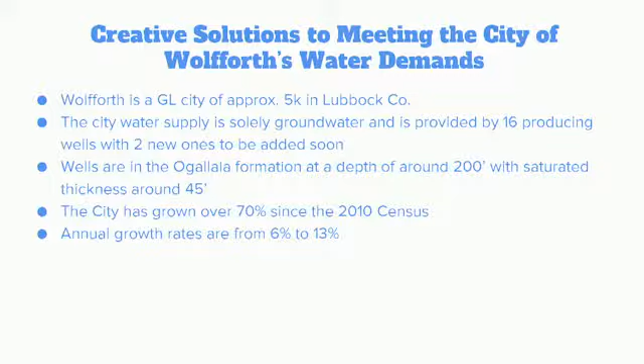We also are in a high growth area. Lubbock is growing to the southwest, and since the 2010 census, when I first became city manager, which has been almost exactly 10 years, we've grown over 70%, and growth rates can be anywhere from 6 to 13% per year. So we're being hit pretty hard with a lot of growth, and during that time we've drilled a couple of new wells, but they're not in production yet. I'll talk a little bit more about how that's worked out.

We have a certain number of technologies for a small town. We try to be ahead of the game. We've implemented a small GIS system. It's very unsimilar to what most of the larger systems and towns have. But we also, for quite some time, have used SCADA for all of our well control systems and controlling our water towers and that type of thing. And we are fully electronic read meters, AMR, completely across the town. As we've grown, we've been able to implement technologies a little bit easier than a town the size of Lubbock or the larger cities could do.

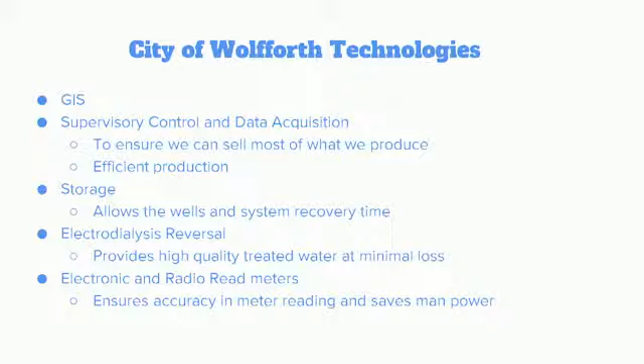Our storage, we have tried to expand as we've gone along. One of the things that I primarily want to talk to you about this afternoon is electrodialysis reversal. This is the technology that we picked to upgrade our water quality. We have a lot of talks at these conferences about volume and where to find more water. But due to regulatory issues, we had to correct some of our contamination issues, and I'll go into a lot of detail about the electrodialysis reversal.

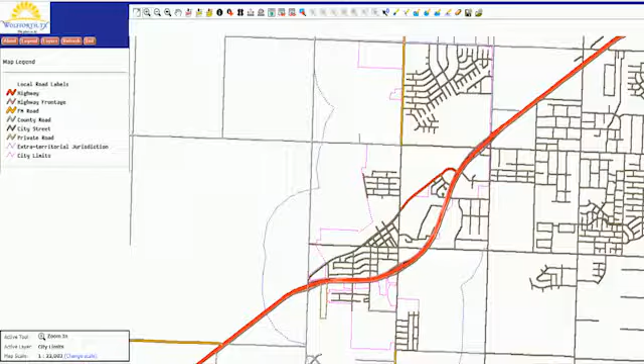I have a little trouble with the slide there. I talked a little bit about the electronic read meters. A couple of things we've done that are kind of interesting. Our GIS allows us to work with all of our infrastructure utilities. This is kind of just a skeleton view of our town, but we have layers in our GIS that allow us to look at our water system in any format and drill down into what our water system is doing at any point in time. We could look at our meters, our fire hydrants, our flows in our fire hydrants. This is by a company out of Marble Falls called 3CGO, and we use their GIS.

One of the interesting things that we've done to try to keep up with our maintenance on our wells is each well has its own website, and that's kind of an interesting concept. We go all the way back to the drilling logs if we had them. Most of our wells were old farm wells, actual irrigation wells from back in the past, so we've taken all those old drilling reports, any logs, or any type of workover that we've done with them.

One of the main things we do is we've purchased our own camera system, and we do downhole videos every time we pull the pumps and see what kind of progression we've got in the maintenance of the well. And that's been very helpful to us to have that individually.

We just use Google, and we use a process called Google Sites. And so that's how we keep up with those things. But there's an example of one of our original well logs from probably back in the 40s or 50s.

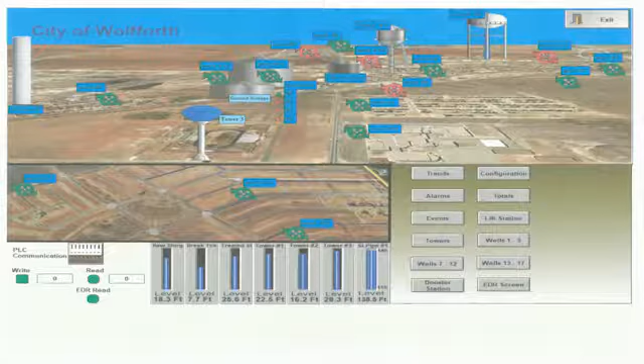Here's kind of a snapshot of our SCADA system. This shows kind of the activity and just a dashboard for the system, and you can see all of our elevated towers. We can see how many wells are running at any point in time. And for a town our size, we run with a pretty small public works department because a lot of these functions are automated.

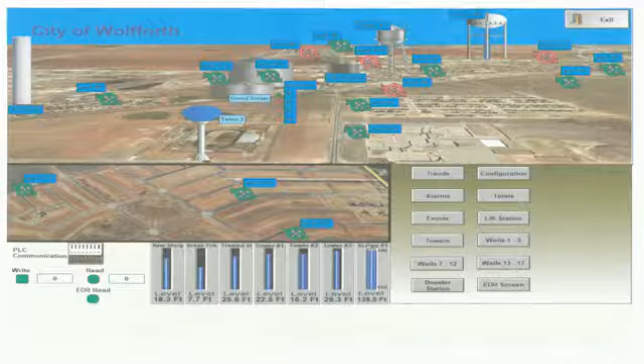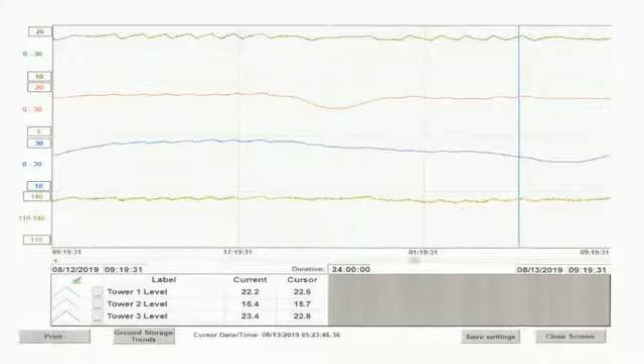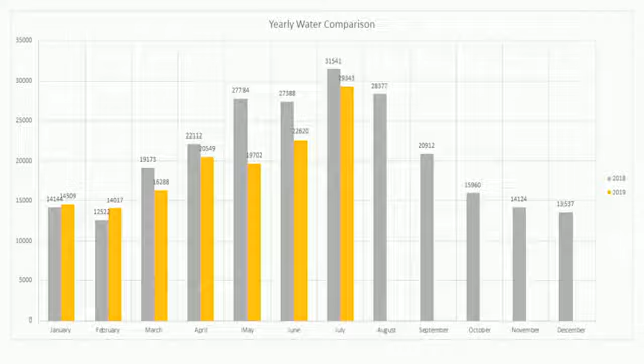This kind of shows an example of our elevated storage and how it progresses during the day and over the evening. But these graphs are helpful to us to see where our peak times are. A lot of times, as city manager here, I get a lot of questions. Texas Tech comes over and wants to do a lot of projects with us. And we've even had high school students that are interested in doing projects, and they want to know how conservation and storage and all these other factors affect our water.

And really, this graph is just kind of to show it's really hard to get a handle on that because most of what we produce for the consumer is used, or the highest portion of the usage is for landscape irrigation. In the wintertime, we average maybe 650,000 or a little bit better, of usage. But in the summers, it more than doubles that, and so most of that goes to landscape irrigation now.

And you can see the gold bars on the right; those are this year's water consumption. Our growth has continued to come on at a very high pace, but you can see this year we haven't used as much water. It's been a little bit wetter year earlier in the spring, and it's kind of like Senator Perry said this morning. Now we're back in a drought area.

So let me go back. I talked a little bit about electrodialysis reversal, and this is what we want to kind of focus on this afternoon. But if you guys can play the video, we might see if we can get that to work. This is a very short video of how the filtration technology that we use works.

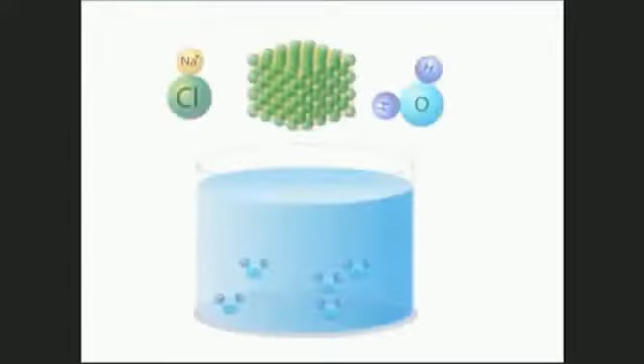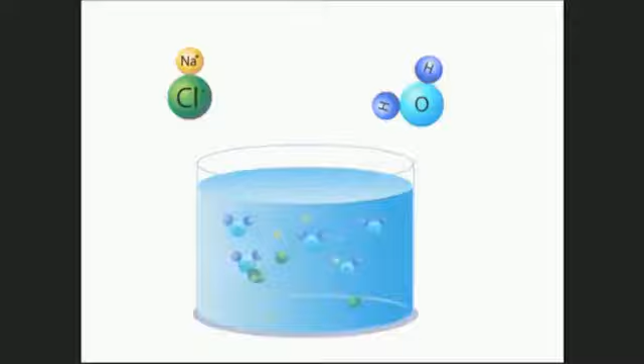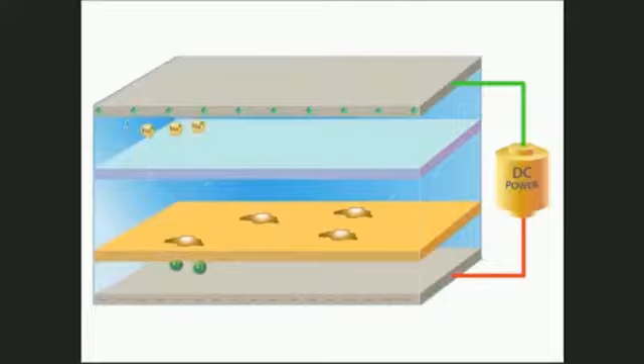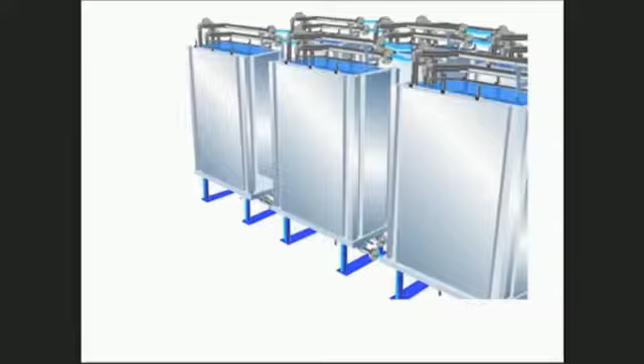There you go. Water, with all its beauty, has an interesting adventure as it flows through the environment. As it moves in swiftly flowing rivers or slowly in lakes and through the soil, water picks up minerals and salts. These salts and minerals are naturally occurring, and they have a variety of uses when they are in solid form. But water, because of its polar molecular structure, can dissolve salt. When this happens, salt is broken up into individual ions. The positively charged ions, like sodium, are called cations, and the negatively charged ions, like chloride, are called anions. When salt is dissolved in water, these ions move freely through the water as individual atoms. Sometimes the concentration of salts and minerals can be too high for drinking water, industrial use, or irrigation purposes. The process of removing salt from water is called desalination. Ions such as salt have the ability to move in water if direct current electricity is applied to the water. The negatively charged chloride ion moves to the positively charged anode under the influence of electricity, and the positively charged sodium ion moves toward the negatively charged cathode. Electrodialysis is an advanced membrane technology that utilizes this ion movement to desalinate water. With electrodialysis, the ions move through special membranes and create two separate streams, a desalinated stream and a concentrated salt stream. In addition to using electricity to move and separate salts from water, electrodialysis also uses electricity to clean the electrodialysis cell. In normal use, salts and fine organic material may tend to accumulate on the membrane surface. But by reversing the flow of the applied direct current, salts and organics are driven back into solution and cleaned off the membrane surface. When many membranes are combined, a full-scale membrane stack is created. And this membrane stack is usually one of many stacks that are used for a large-scale electrodialysis reversal plant. This is how electrodialysis reversal technology is used to transform previously unusable saline water into a new freshwater resource to create water for food, water for industry, and water for life.

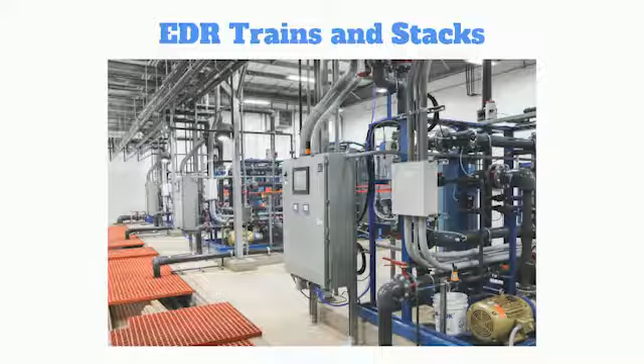Yeah, they've rebranded that particular video. When we first started dealing with GE, that was actually the company that started with this technology. They actually purchased the company and started doing that. So I wanted to kind of give you an overview of EDR before I started talking about how we got to this point. This is a picture of our plants. At this point in time, we have three what they call trains, and those consist of those stacks that she mentioned in the video.

And so we're actually in a two-stage treatment process to use these through the stacks themselves. Once again, they all talk to our SCADA system. It's all electronically controlled, a very automated process. And this is one of the stacks, or a couple of the stacks, without their clothes on. This is what they look like when they're uncovered.

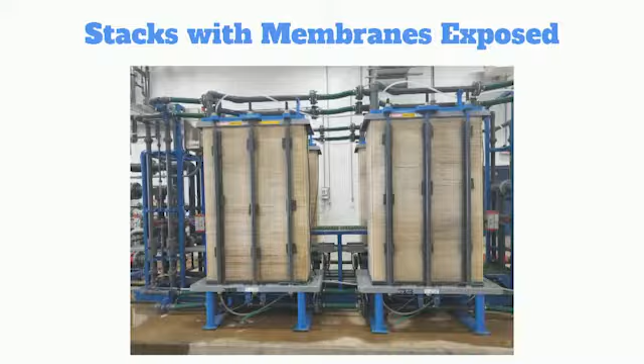But there are around 1,600 membranes stacked in that individual stack. And so this is what they look like when we actually maintain those. Those can actually be taken apart membrane by membrane. So how did we get to this point?

Well, I can't remember. Probably somebody in here will remember better than I can when TCEQ changed the requirements for arsenic and fluoride. In our local groundwater, we have pretty high levels of fluoride. We're around 5 to 6 parts per million, and then in arsenic, depending on the well, we'd be as high as 18 parts per billion.

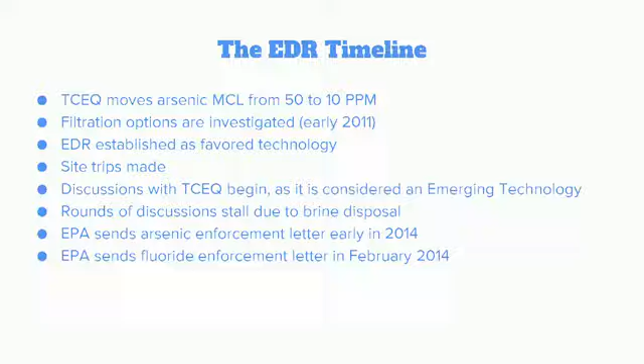The MCL used to be 50 parts per billion, and they lowered that standard. So we became non-compliant. The water didn't change any. That's kind of hard to explain to your citizens that the water didn't change. We weren't putting arsenic in the water. There wasn't any type of process that caused that, just the standards changed.

And so the TCEQ came to us and started talking to us about mitigating those two components, so we started looking at technology. We started looking at RO and trying to find out what was the best option. Well, with our water scarcity in West Texas, we felt RO was too much loss in the treatment process; you could have a pretty high level of loss in the RO. So we established this as being a good technology for us to use.

But one of the problems we found when we made the site visits was that you had to do something with the brine stream. She talked about the concentrate in the video that you saw, and that became problematic with TCEQ. Nobody wanted to give us the release to do anything with that brine stream.

We talked about potentially putting it on the parks or putting it in a park lake or just running it down that way, and that was unacceptable. We talked about doing some ag type of application, and that wasn't acceptable. So that really extended the process for a long time because nobody really wanted to deal with the brine stream.

It was also an emerging technology that's been used in some other areas, but in a drinking water format, TCEQ was pretty uncomfortable with it. Also, as we went along with this process, the EPA got involved. So ultimately, that really stepped up the time frame. TCEQ, at that point in time, was kind of out of the picture.

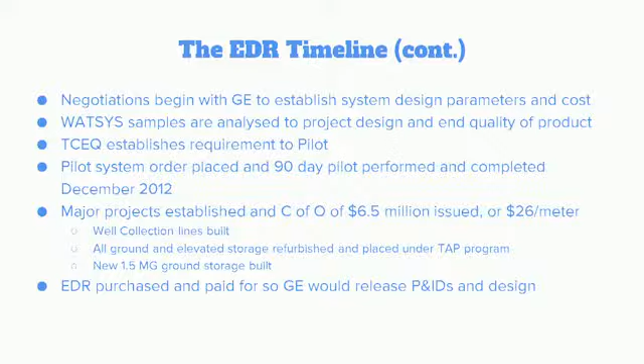But when you take on a big debt project like this, the financing is pretty simple. You divide it by the 20 years, and you divide it by the number of water meters, and that's how the impact hits your customer. And so at the time that we did this, it was about $26 per water meter. By the time we finished, it was up to about 28. So it was a fairly high percentage in terms of our customers' water bills.

And so, one of the things that we got into with GE, I don't know that it would be that situation with Suez anymore, but we couldn't get the P&IDs to actually finish the design of the plant until we paid for the $1.5 million for the system. So that kind of strapped us and held us up for a little bit there too.

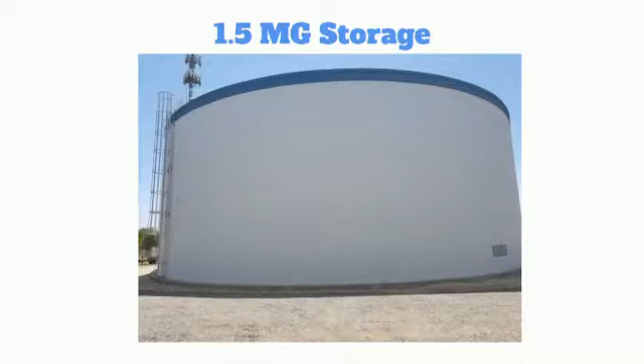So while we're working on the regulatory issues and trying to get all this done with TCEQ, one of the things we knew we needed was additional storage. And so, what we were working on is we had about 750,000 gallons budgeted in storage, and I believe it was preload. Well, Caldwell Tank came to us at that time, and they were having a little bit of difficulty competing in this market. But long story short, we were able to purchase the 1.5 million gallon storage for about what we had budgeted for 750,000 gallons. So we were very fortunate.

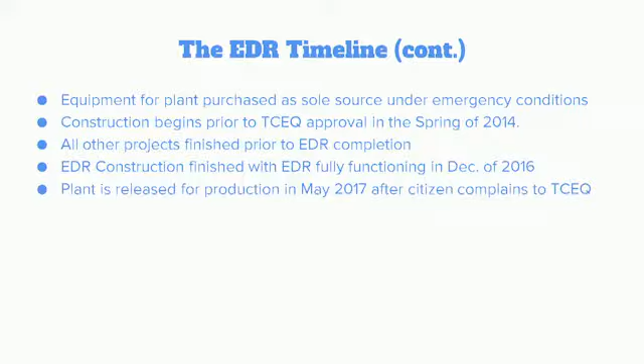Along with this, we finally got into the spring of 2014 and began construction. It was very difficult to get this going. The electronics of this type of product, the grounding in and of itself was just a massive project. As we went along, we got all this put together. These are some dates that ultimately we moved along to, but it took us about 2 years to get the plant built. But an interesting story, we finally got the plant built, put together, and got it done.

And we'd had it running for about 6 weeks, and of course, the consumers had heard all along that we were building the project, and we'd raised their bill for a couple of years because we'd already started paying for the debt. So we'd had it running for about 6 weeks, and we were testing. We were actually kind of wasting a lot of water in the testing process. And so finally a consumer called and asked why were we not turning that on? And I went on to explain that TCEQ had not turned it loose yet, that they weren't ready to do that. She said, well, is there anything I can do?

So she actually called TCEQ and complained and told them, look, we've had water issues for a long time. Now we've got a perfectly good water system. Why can't you turn it over to us? And, surprisingly enough, that one phone call got it knocked loose. By the end of that evening, I had a letter that said we could start production in the water at midnight that night. So it was kind of an interesting process. So it's been a great process.

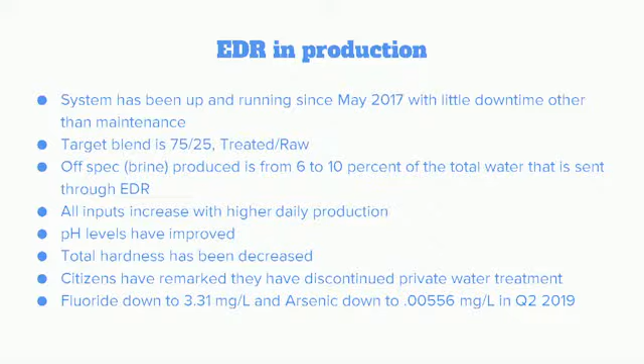We wanted to show you a couple of things on here. Our acid production. Our acid is in there to change the pH, but that's the way the system is cleaned. The electrodialysis reversal process uses some acid in there, and so we've got a couple of things that are really causing us some issues. We have a lot of sand and a lot of manganese, and we're expecting to have to go ahead and do pre-treatment now, and we hope that doesn't waste any more water than we are.

We're very happy with the fact that, depending on the time of year, we're pushing anywhere from about a 6 to a 10% loss on our treatment. So it's working. That's been very effective and working out really well. And we're testing different types of pretreatment.

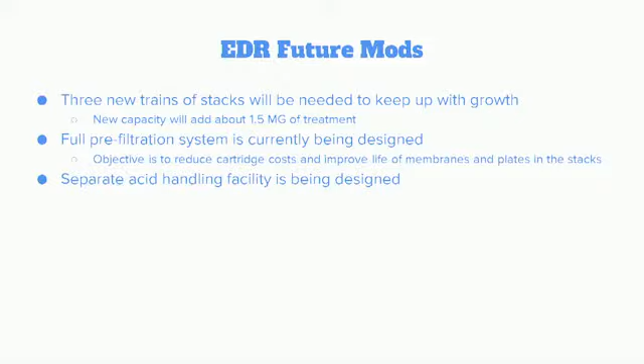We also came up short in understanding how much acid we'd use to clean the plant and how much we were working with. So we're working to change that. Our first will be the pretreatment, though, because of the sand and manganese that we're capturing. We want to try to mitigate that issue if we can. So we have some issues that we're still working on.

I think we've got TCEQ pretty happy with us. I think Water Development Board is recommending this technology to some other locations that have got issues with arsenic and fluoride. It's been helpful for us to have taken care of all this for some of these other communities. I think they're still being requested to actually pilot that, but

we've got some other options that we're looking at in the future. We're talking about expanding our well farms. The Water District's helping us with doing some testing in deeper Edwards Trinity High Plains. We've looked at the Dockum, way too brackish, way too salty, I think, to be practical at this point, but Edwards Trinity High Plains may be an option. And so purchasing from other cities that have excess allocation, kind of like was mentioned this morning, and looking at some type of reclamation and reuse.

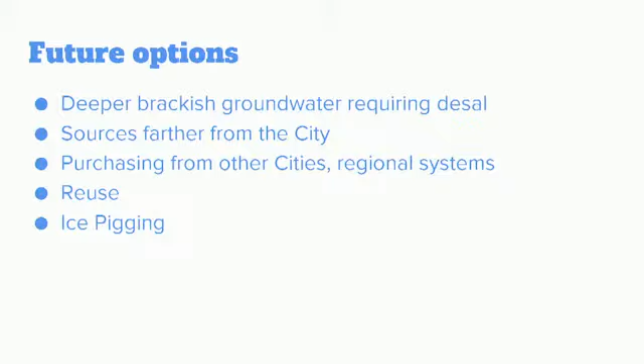And also one of the technologies that we've considered is ice pigging. The amount of manganese and sand that we had in our system, some of that's still in the pipes. You still see iron and you still see manganese come through from the pipes. But ice pigging is a technology where they introduce an ice slush through the municipal water supply, and that actually comes out on the ends. So that's a pretty quick run through on what we've done. But we've got some time for some questions.

Nope. Down the sewer. Yeah, it's going down the sewer. We're trying to work with TCEQ. We'd like to do some ag application type of permits. It'd really look great on our park, if we could, and that may be an option for us in the future to treat the reject and then use that through an application permit.

Wolfforth is a smaller community with fast growth, so you guys have a good base for funding. Can you talk about some of the funding applications or things that towns or communities that might be interested in this could think of when it comes to implementing a project similar to this?

Yeah, it's a pretty expensive technology, as they all are. I think one of our issues is we're a little bit too affluent to take any loan forgiveness from the Water Development Board or anything like that. So in our situation, it's kind of been incumbent on us to just borrow the money and increase the debt load. It's been pretty tough in terms of funding, and these other additional situations that we talked about, like the pretreatment, are going to be about the same way, because it's the affluence of the community that doesn't give you too many other options other than just debt.